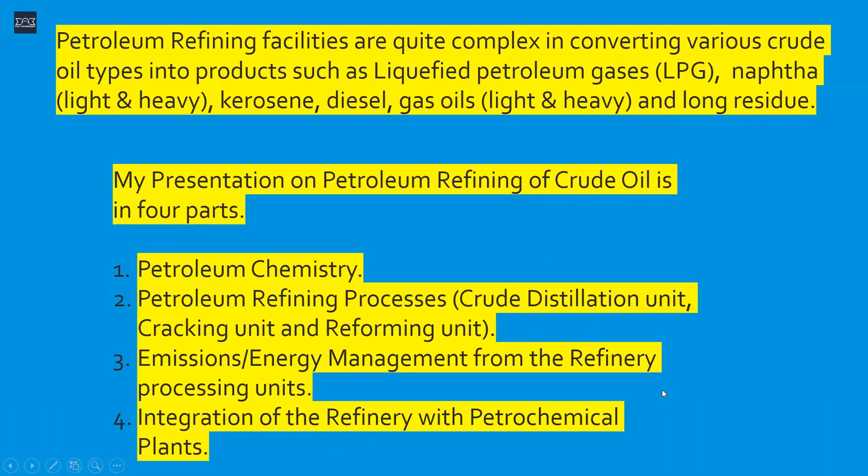Latterly, in the States, the Biden administration has provided some incentives to some refiners to switch to sustainable alternative aviation fuel involving biomass, vegetable oils, and so on. But this presentation will focus mainly on crude oil and not the sustainable type of refining.

Now, this is just a snapshot of a table relating to the various countries and continents providing the amount of crude oil processed per day. In particular, there's the Jamnagar refinery in India, which I'd like us to note. There's the new Dangote refinery, which is 650,000 barrels. And of course, the Sasref refinery in Saudi Arabia, which is 305,000 barrels per day. It has a 2-train crude distillation unit.

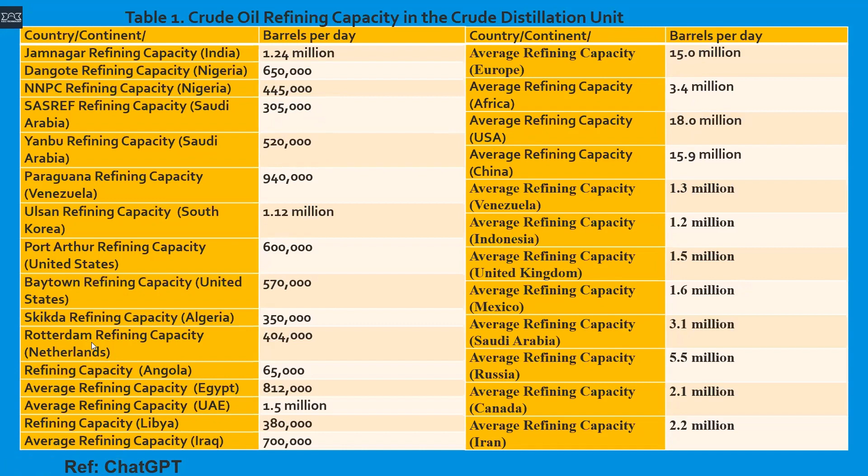And again, what we've got here will be the average refining capacity in the States and in Europe. I'd like us to be mindful of these values, which I'll be describing later on in my presentation, ladies and gentlemen. All the others from other parts of the world are as shown here in the table.

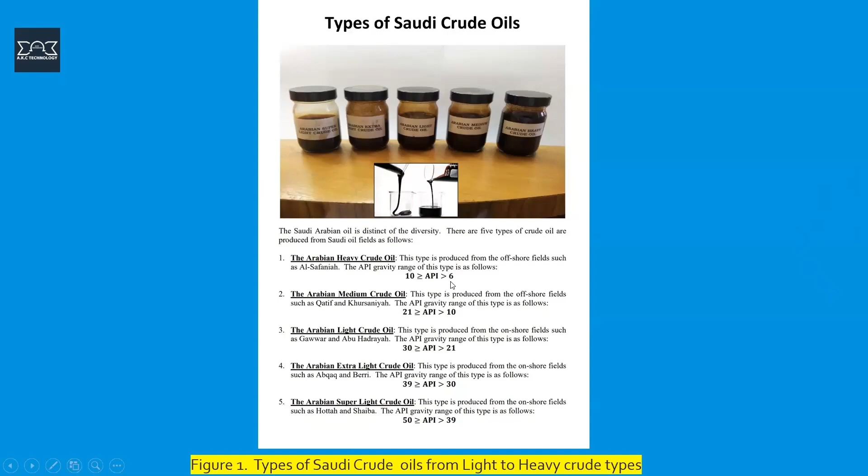And this comes from these crude types from Saudi Arabia, involving the range of crudes from the heavy crudes to the light crudes within these various ranges of the American Petroleum Institute. What we've got are the types of crudes from sour to sweet. The sour crudes contain a lot of sulfur content. And of course, these are highly premium types of crudes, which are highly paraffinic in nature.

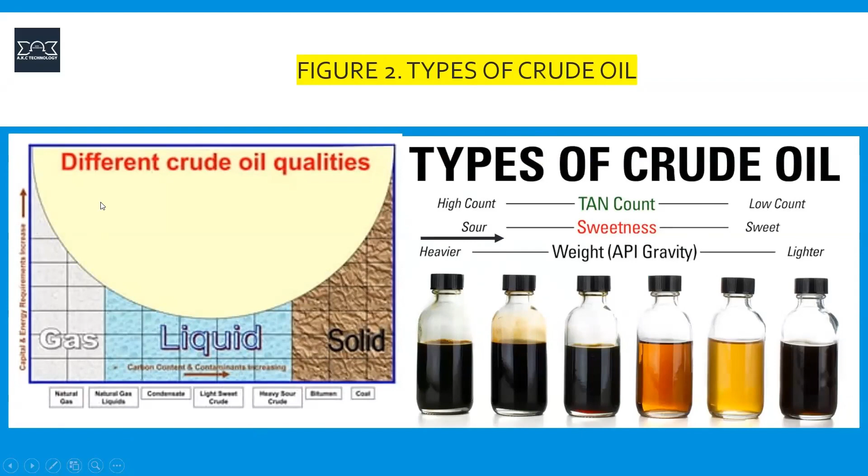On the left-hand side of this slide is just the phase change between gas to solid, involving the different crude oil qualities.

Please bear in mind, ladies and gentlemen, that we do not have the olefins, the unsaturated compounds, in the crude. These are actually produced during refining in the FCC, which is the fluidized bed catalytic cracking unit, which I'll talk on later on. I'll show you a video on that.

The crude also contains a lot of metals, sulfur contents, nitrogenous compounds, and salts. These must be removed during the refining process. The reason is that they could have severe adverse effects on the various process equipment, such as the vessels, the heat exchangers, and the pumps, and so on, relating to corrosion, plugging of the heat exchangers, of the tubes of the heat exchangers, and so on. So we must be confident on these things.

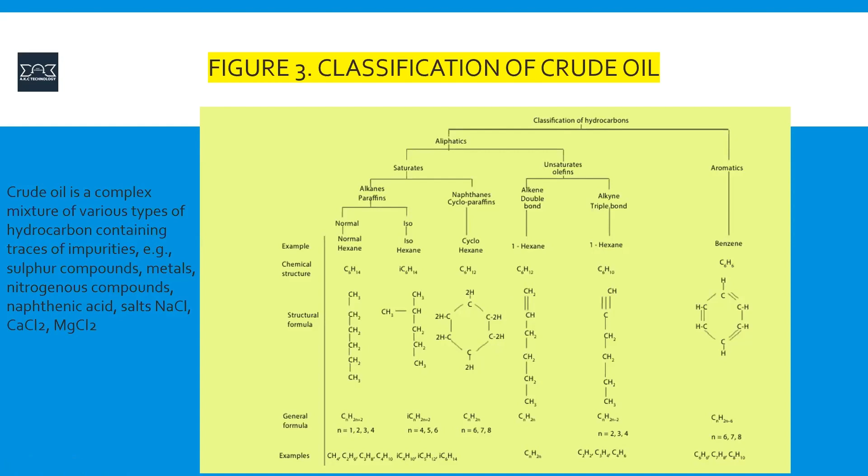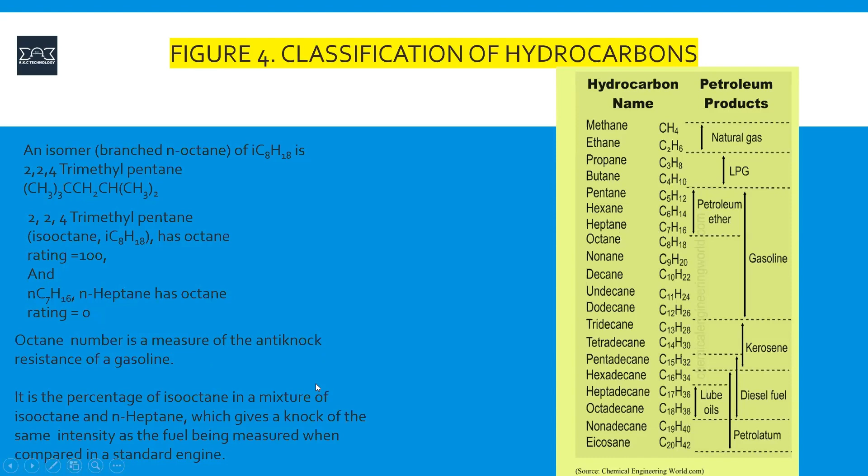And of course, in the categories and classification of crude oil, apart from the various compounds which we've highlighted earlier on, such as the salts, they are mainly paraffinic, naphthenic, and aromatics.

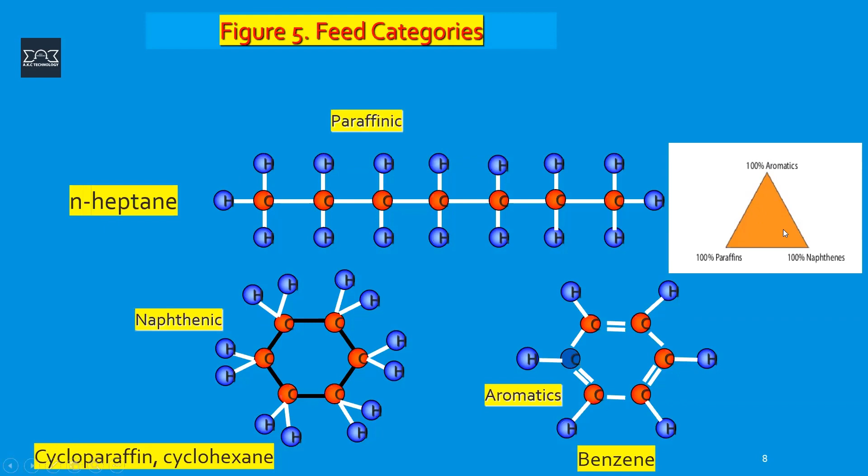If we look at the triangle, the crude will be in the middle, and the reason is that it consists of various percentages of the paraffinic, the naphthenic, and the aromatics. So all the various crude types are a proportion of these various compounds, ladies and gentlemen.

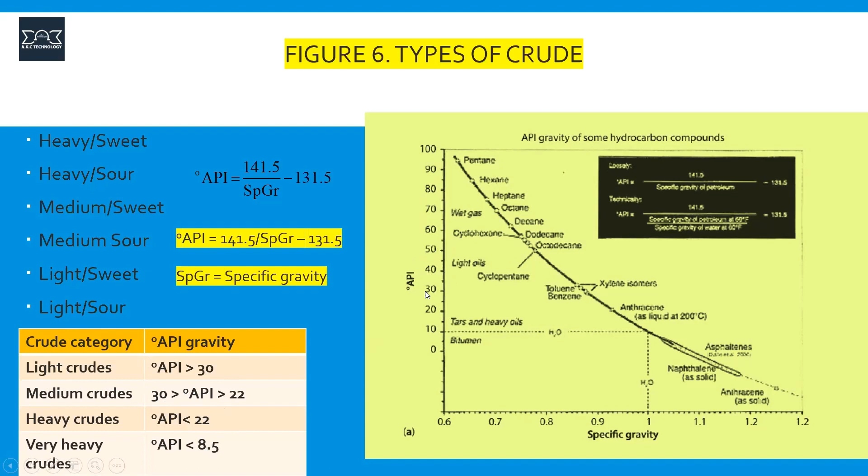Again, how do we classify the crude? We've got the American Petroleum Institute formula relating to the specific gravity, with the reference being the specific gravity of water. If we flip to this chart, from this simple equation we can get this profile, and classify our range of crudes. Knowing the specific gravity, we can classify into these different categories of crude types, as shown here. The light crudes will be above the 30 mark of the American Petroleum Institute standard.

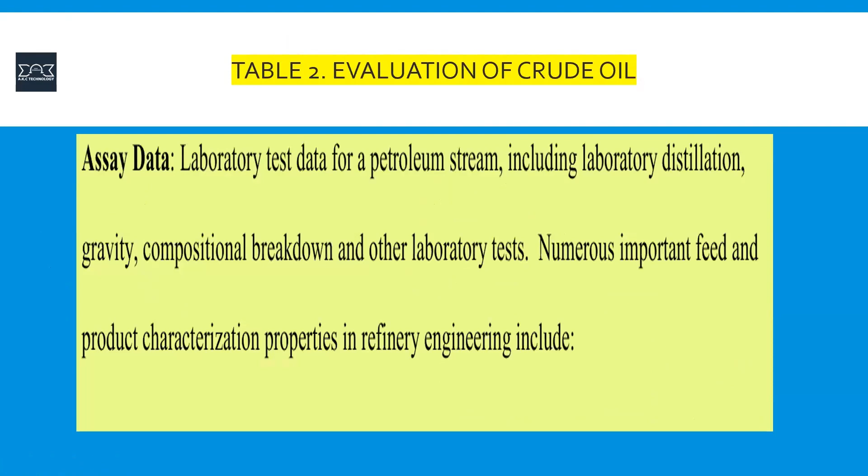Another type of classification relates to the assay data. The assay data allows us to have various series of experiments, and these are the various tests that could be carried out, from the API, which you have just seen, to the Watson characterization factor, as well as these other ones, ladies and gentlemen.

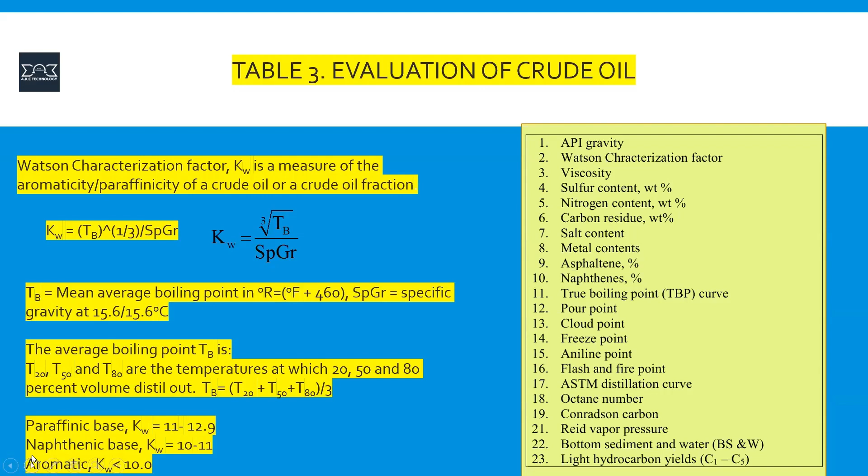An example of number 2, the Watson characterization factor, is obtaining the mean average boiling point at these various percentages which have been distilled. We find the average from this volume that has been distilled, in the old unit, which is Fahrenheit. We add a constant value to it. We know the specific gravity, and using that simple formula we'll be able to classify the types of crudes we've gotten, within these various ranges, either paraffinic, naphthenic, or aromatic.

Now, another classification relates to what is called the true boiling point. It's a basic tool which allows the refiner to decide how suitable the crude is before it goes into production. It uses the American Society of Testing and Materials, involving 15 theoretical plate columns, as you can see in that diagram.

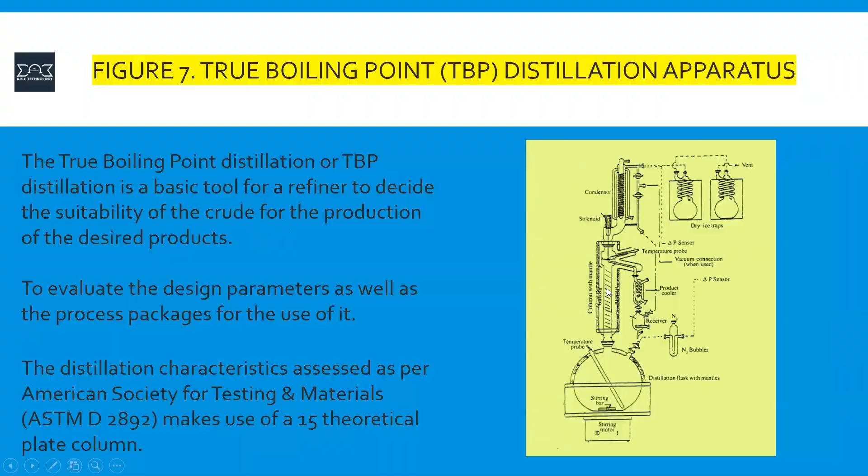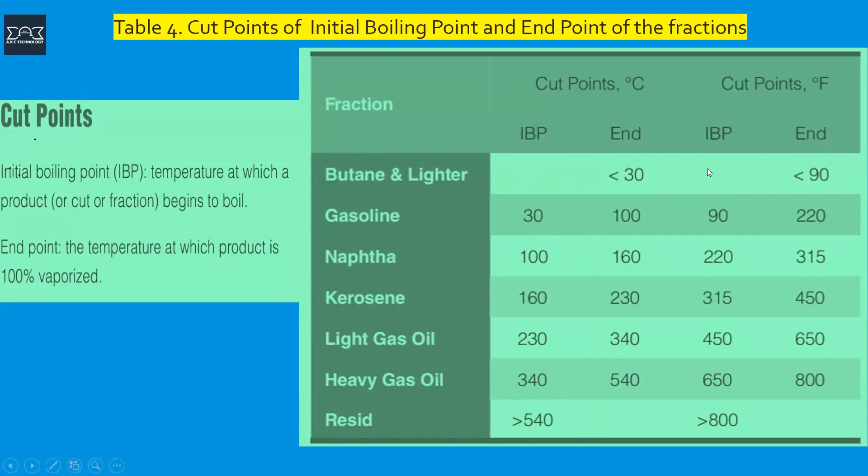Now there are different cuts relating to the various fractions obtained, between the butane, the gasoline, down to the residue. It involves the cuts with the initial boiling point of these various fractions at which they start to boil, up to the final end point when 100% of these fractions has actually been vaporized. So we can determine the various cut points either in Celsius or in Fahrenheit.

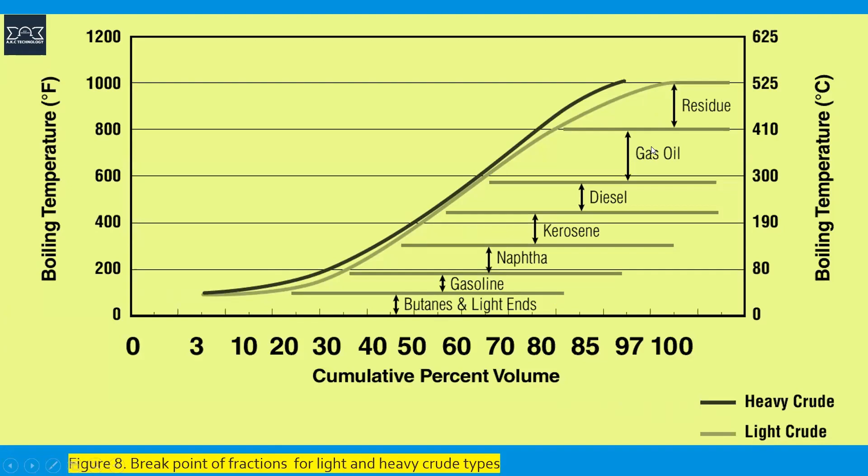And again, we can have our plots, and these are various plots for the heavy and light crudes. You can see the various endpoints there, from butane to the residue. And that completes the chemistry aspect of the crude types, the various crudes.

And again, we must understand the kinetics, the rate of reaction relating to the kinetics, the concentrations, and the Arrhenius equation, activation energy. When we're dealing with catalysts, this is very important, ladies and gentlemen. Of course, again, we must understand the thermodynamics involved, whether it's releasing heat or consuming heat, as the case may be. But we know the rate of reaction doubles for each 10 degree rise in temperature. And if we're dealing with a catalyst, that is very serious for us, relating to the heat of generation, because as it's brought into the system in the reactor, it's taken out relating to the heat of removal.

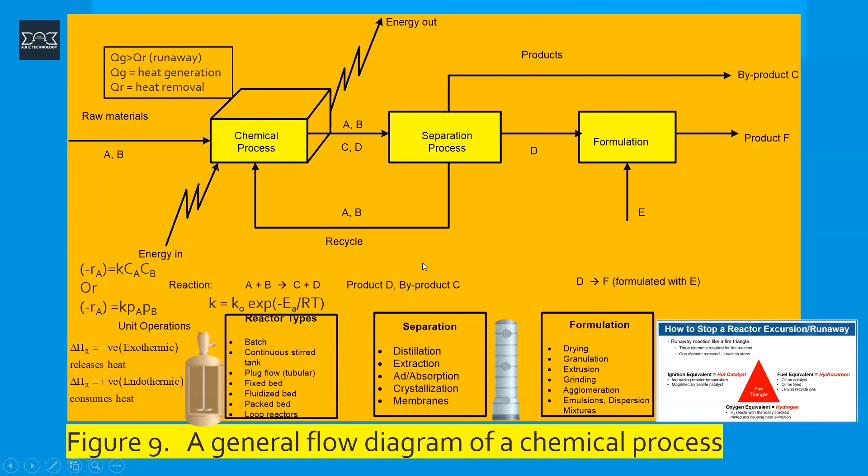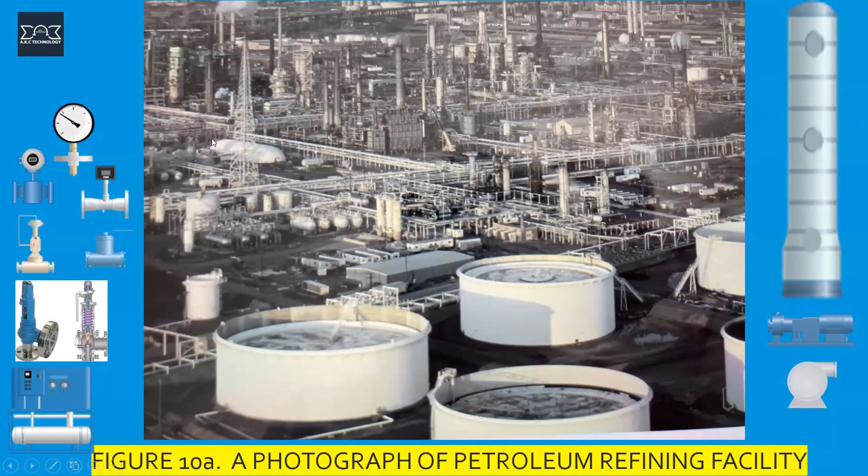Here's a photo of a typical refinery. What we've got here is an incredible series of pressure vessels, distillation columns, heat exchangers, pumps, storage tanks, a fired heater, and an incredible network of pipelines.

These pipelines convey flammable, corrosive, combustible fluids, maybe single phase, two phase, or a combination. They go through various instrumentation, such as a pressure gauge, measuring instruments, valves such as gate valves and globe valves, and of course relief valves used to overcome overpressure in various vessels, and of course metering.

If we look closely here, we've got porta cabins in this particular refinery. An incident happened in 2005 with the BP refinery, whereby there was an explosion, and 15 people in one of these porta cabins lost their lives. You can visit the website to see more on the animation of this.

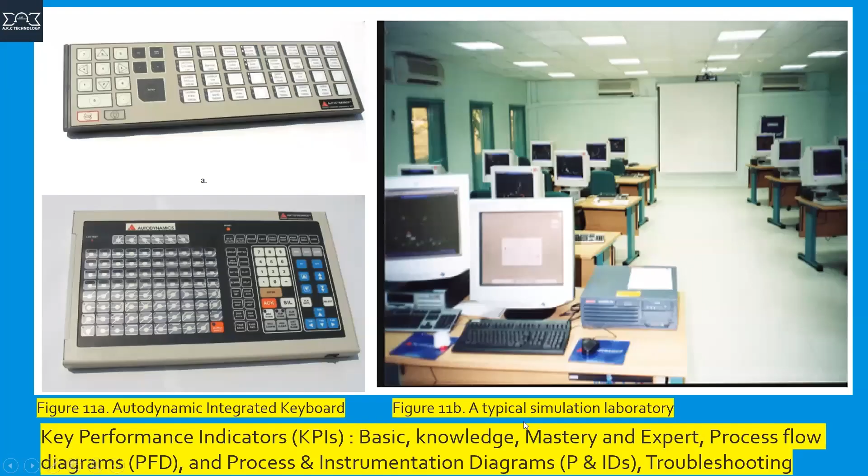Now here is a simple laboratory simulation lab whereby process operators, or panel operators, will need to be able to operate and understand the various process instrumentation relating to startup and shutdown of various units, and the trips that could occur in pumps, motors, or valves. So basic to mastery knowledge involving the KPI must be acquired, otherwise it presents a difficult problem for people going to the plant.

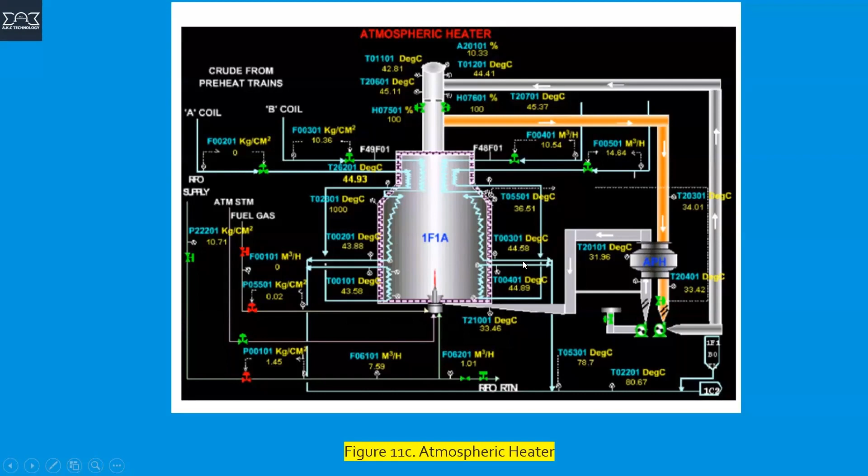An example of this is a fired heater. You can see all the various instrumentation connected to it, and the understanding of its operation, the trips, and the startup and shutdown of these must be acquired.

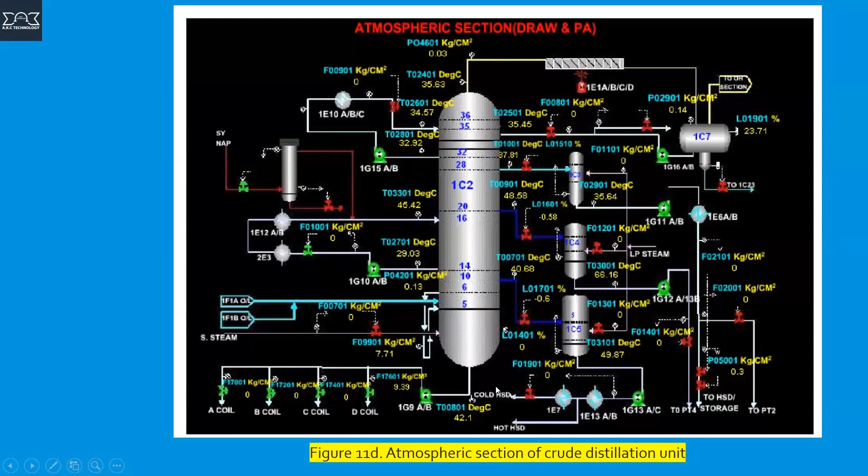Likewise, with a distillation column, the operation relating to the profile involving pressure, temperature, flow rates, and offset conditions such as flooding of the column, foaming of the column, and weeping, are items that operators must be aware of and be expert in troubleshooting and correcting.

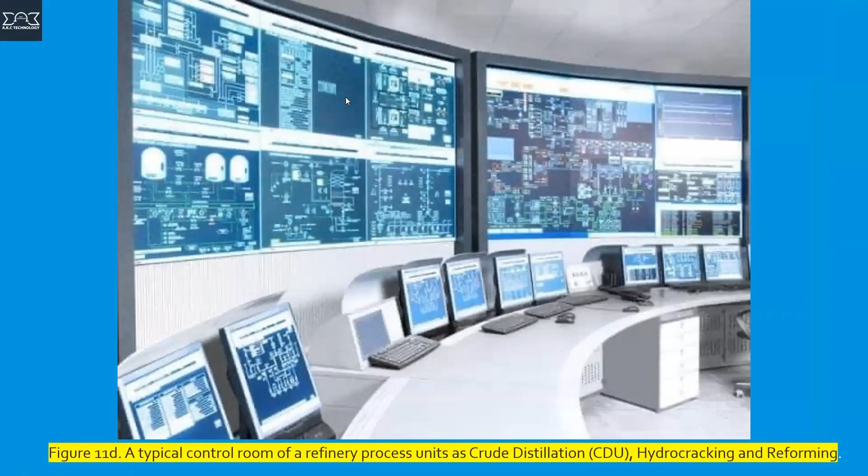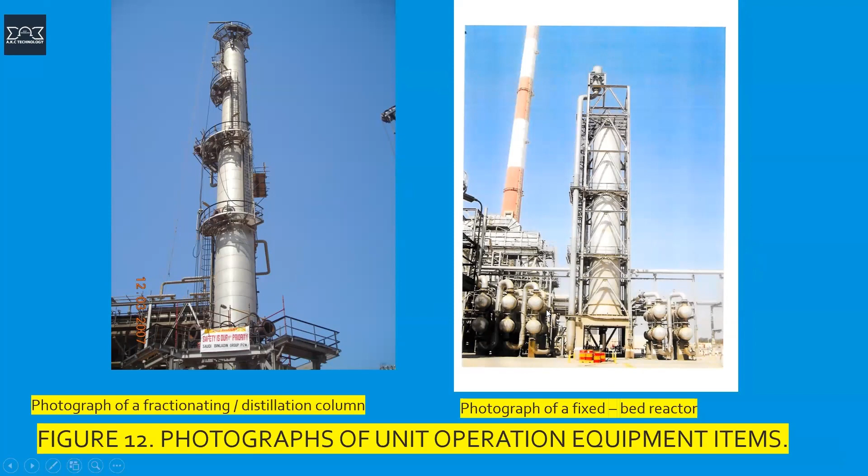An example is this: the distillation column, the fixed bed reactor, and others are centrifugal pump, shell and tube heat exchangers. This one happens to be involving a turnaround issue, and of course we need to acquire the necessary work permit for the work to be conducted during the turnaround. It's an interval of about 5 to 6 years in a refinery where various maintenance work is being carried out. An example here is removing the shell and tube heat exchangers for cleaning because it's being fouled with coke.

And of course, the personnel involved with a supervisor seeing to everything is working in good order, we will have the various process and safety equipment like helmets, the gloves, and shoes, and so on and so forth.

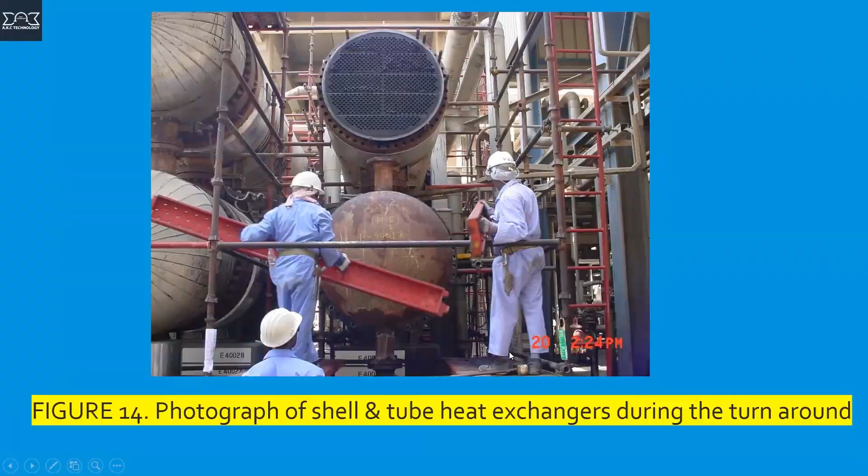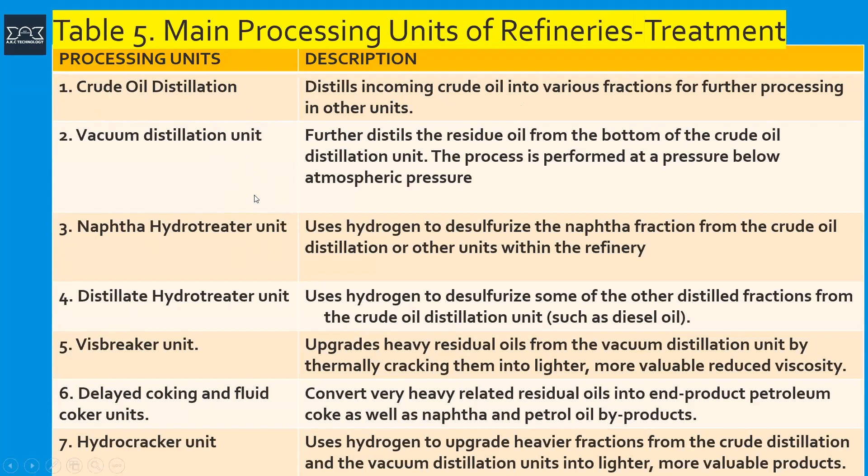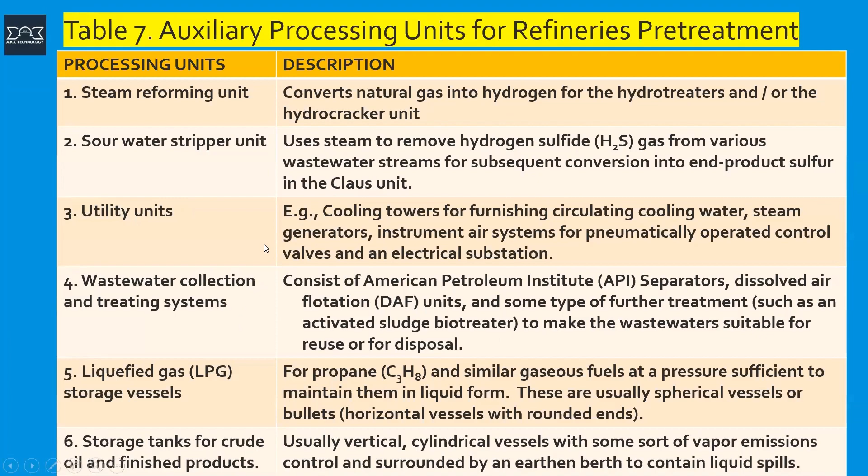Now, the crude units, the descriptions in the refining, is all listed here. These are the various process units, which are all numbered, ladies and gentlemen, and the corresponding description for each of these is also stated, from the crude distillation unit up to the FCC unit, the amine, and the utilities as well in the reforming unit, whereby we're able to obtain the hydrogen, which I'll talk on later in this presentation.

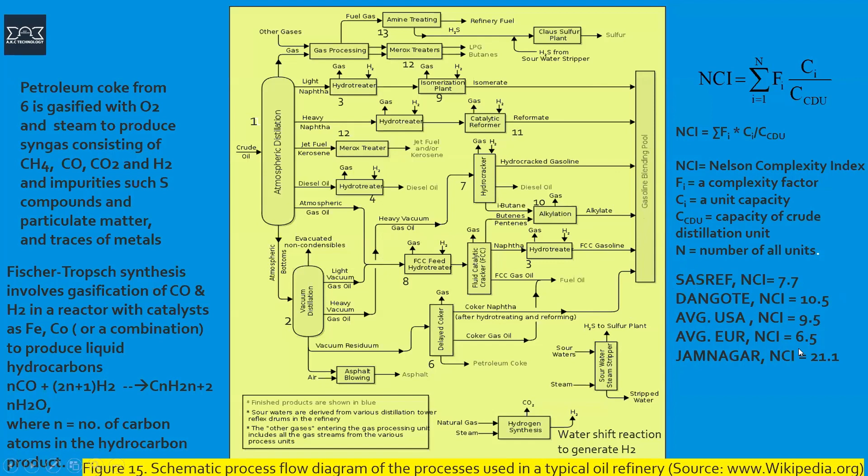The Dangote refinery, which is just being commissioned and is in operation, is 10.5 again, because it has an add-on of petrochemical units attached to it, such as the production of polypropylene, maybe ammonia, urea, and so on. The SASREF refinery is 7.7 in Saudi Arabia. And of course, the averages of the USA and Europe are these respectively, ladies and gentlemen. So the methane reforming is the production of hydrogen, which is then used for the hydrotreating and hydrocracking unit.

It uses natural gas and high pressure, high temperature steam, along with a catalyst, to produce products. The thermodynamics involved is a combination of endothermic and exothermic reactions. The products are carbon dioxide and hydrogen.

The hydrogen here is known as gray hydrogen. If the carbon dioxide is captured during this synthesis, it becomes blue hydrogen. Of course, green hydrogen is when you use electrolysis or biomass.

Once we've got our products, they need to be separated. The only way to do that is using what is called pressure swing adsorption. The carbon dioxide can be compressed and stored, or used in various petrochemical processes.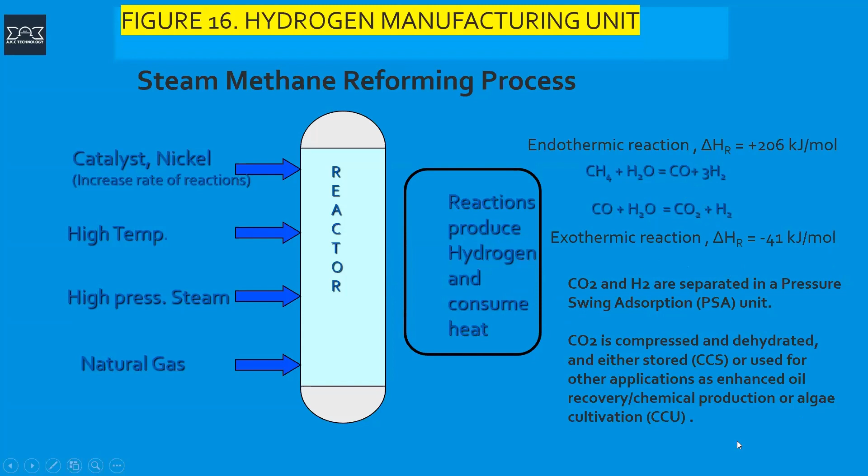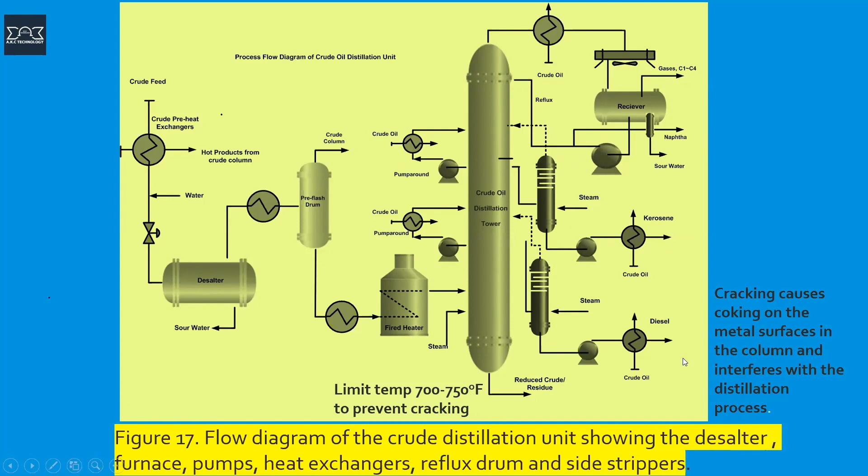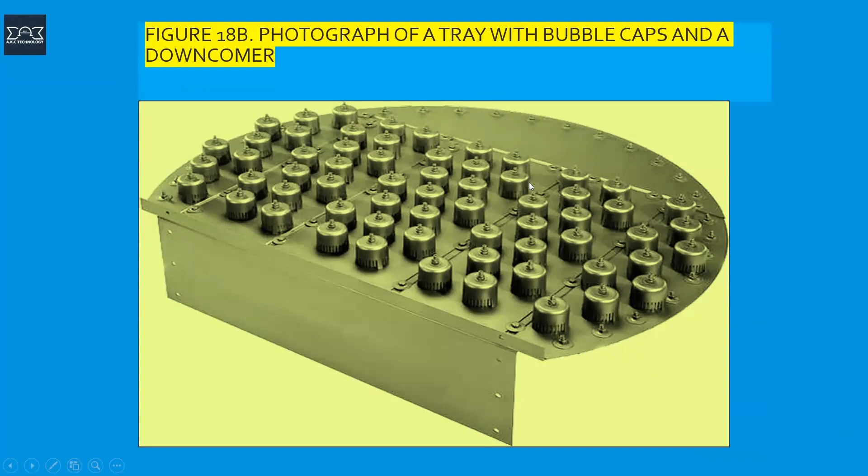This shows the operation taking place between the bubbles and liquids in the column. This is a bubble cap plate, with vapor rising through the slots, mixing with the liquids to reach vapor liquid equilibrium, and the liquid flows down the downcomer.

The long residue comes from the crude distillation unit. By the way, so far this is a physical separation taking place, making use of two parameters: temperature and pressure. There is no chemical reaction yet.

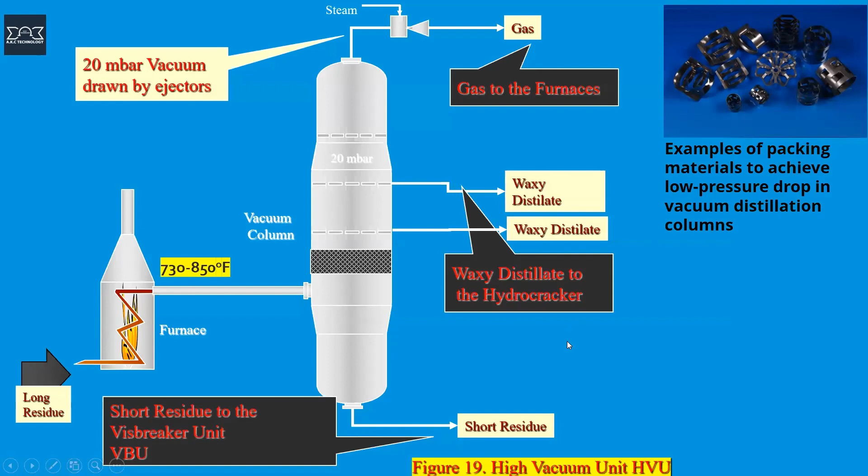So the long residue goes through the furnace at a high temperature. Here, instead of using plates, we use packings, to reduce the pressure and maintain a low pressure, with a vacuum being applied. We get our products as well as the distillates and the short residue.

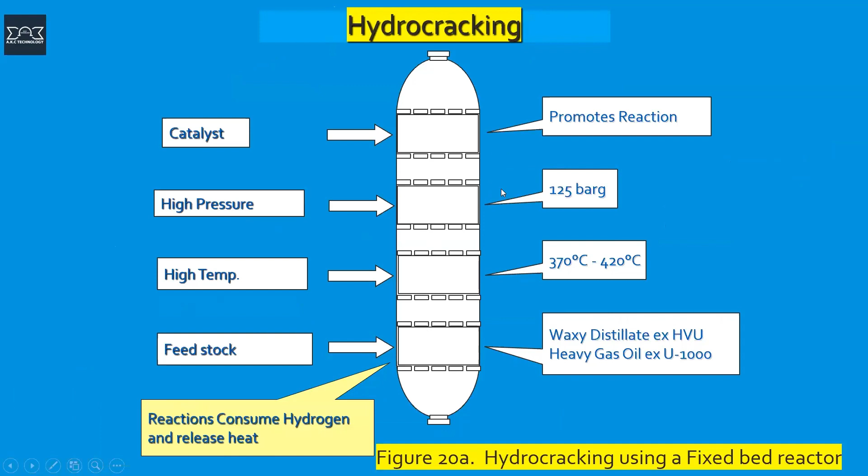Now in the hydrocracking process, the feedstock is the waxy distillate from the vacuum unit. It goes through various packed beds to promote reaction, with catalyst involved. This is the fixed bed reactor.

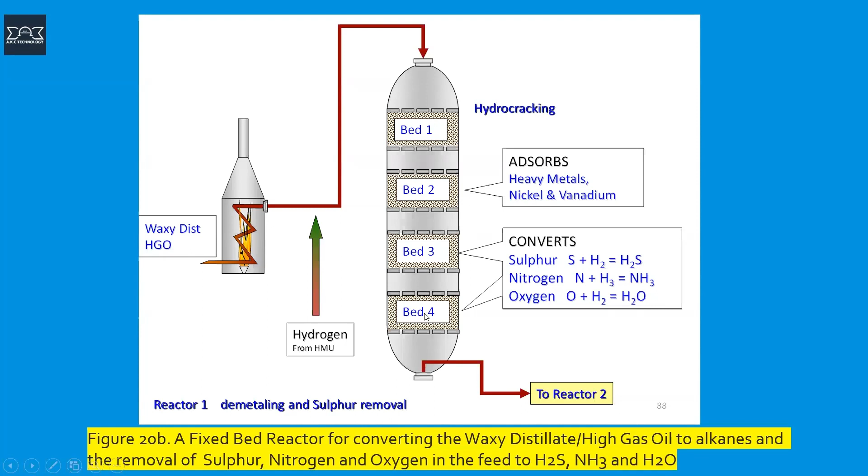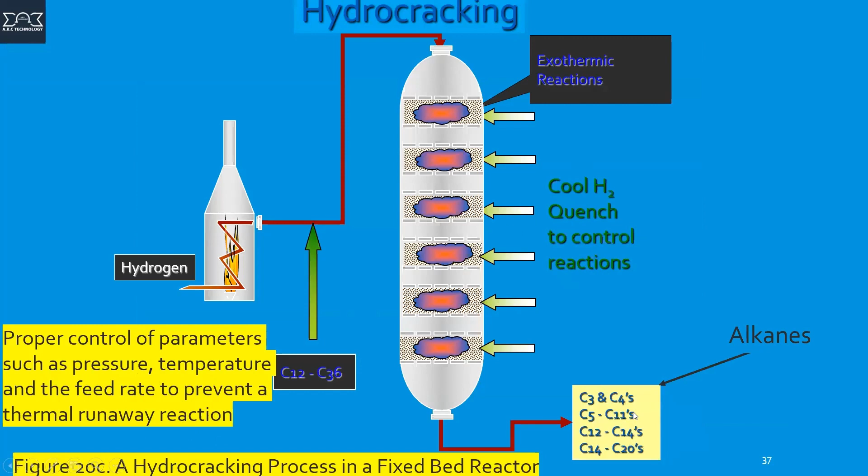Remember what I said earlier about the runaway reaction - this will need to be controlled. Otherwise, the parameters involved, such as temperature and pressure, can lead to thermal runaway. We've got our products, and these products will now have to be separated, which is done again in the distillation column to get the various products for usage.

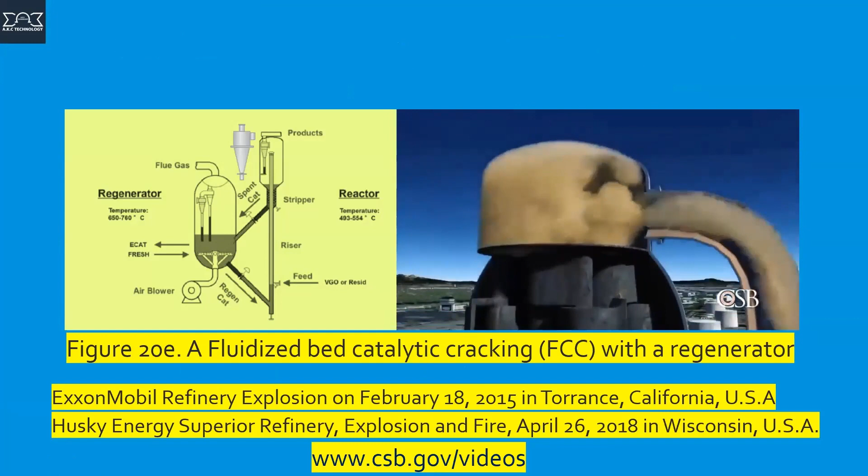The hydrocarbons are first fed into a reactor where they mix with the catalyst. The heavy liquid hydrocarbons are converted into lighter hydrocarbon vapors as they travel up the reactor. At the top of the reactor, the lighter hydrocarbon vapors are separated from the catalyst.

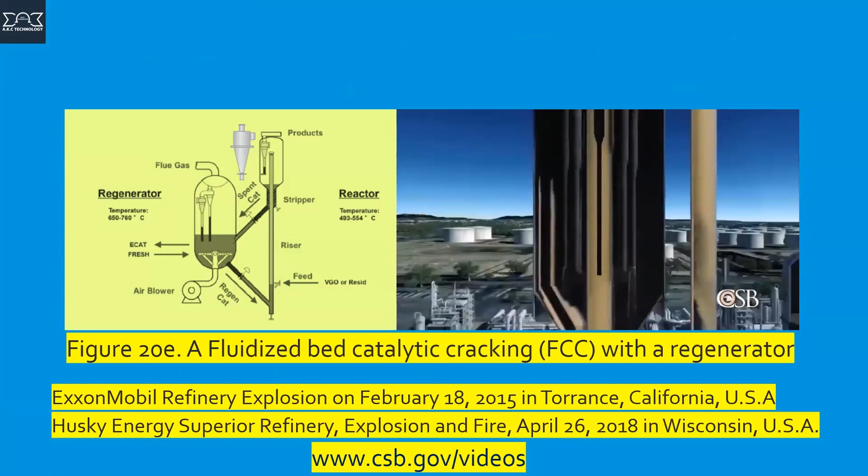The hydrocarbon vapors then flow to the main distillation unit. The catalyst falls down the side of the reactor where it moves through a slide valve to a piece of equipment called the regenerator.

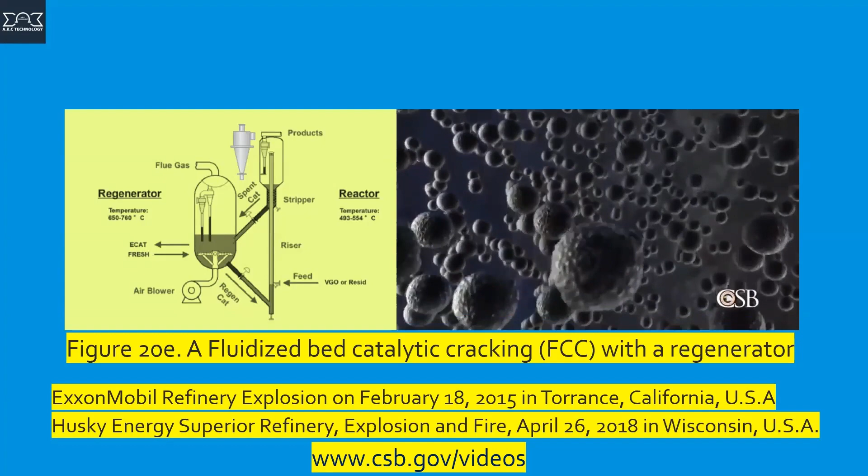During the reaction, a layer of carbon called coke forms on the catalyst that must be removed. Inside the regenerator, air is added, and the coke on the catalyst is burned off. The catalyst is then fed back to the reactor through a slide valve, and the cycle is repeated.

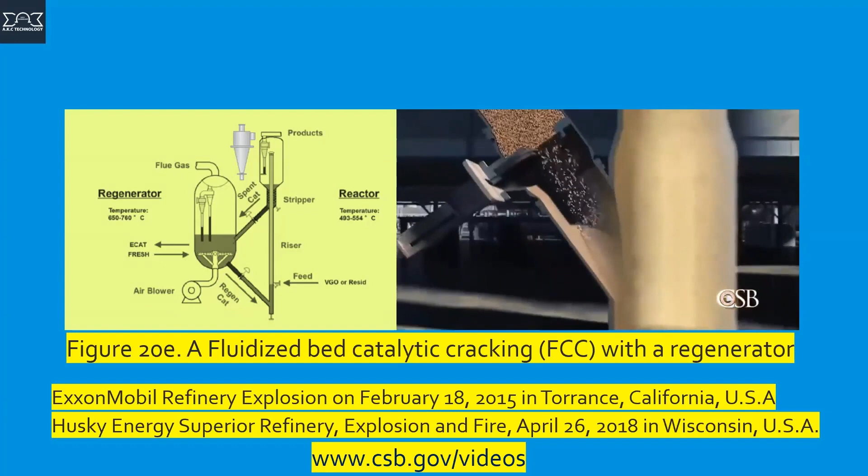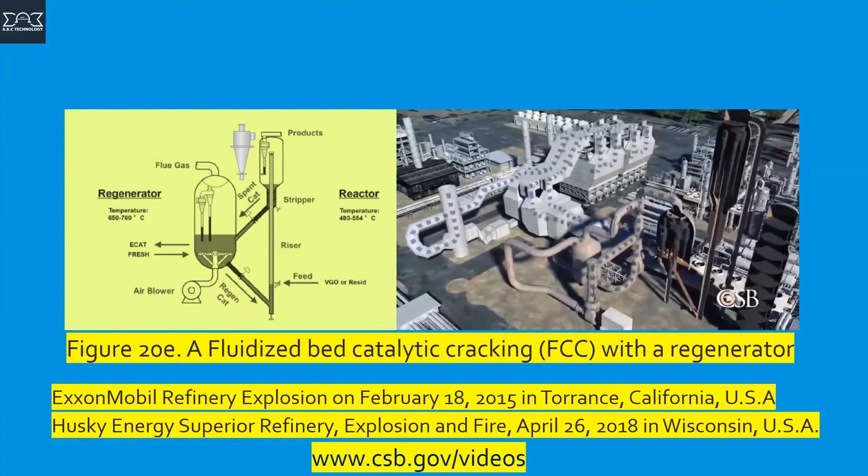When the coke is burned off the catalyst, this creates products of combustion called flue gas. The flue gas flows out of the regenerator and enters a system comprised of multiple pieces of equipment, which remove any remaining catalyst particles present. The regenerator and flue gas system comprise the air side of the FCC unit.

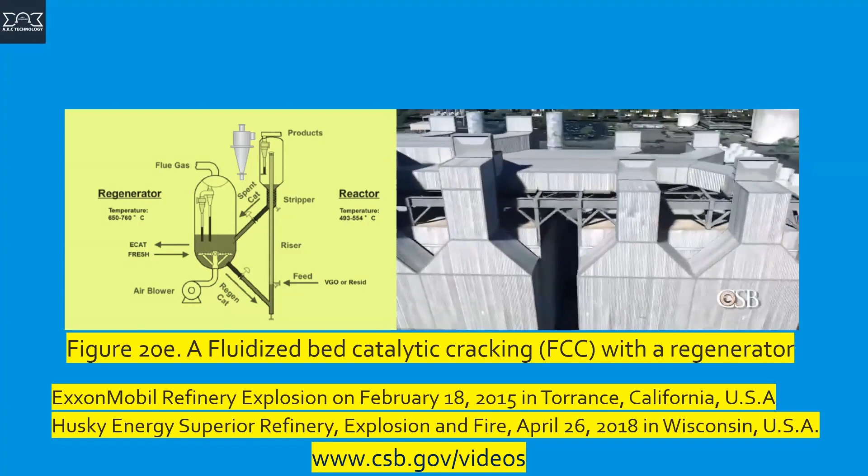The last piece of equipment in the flue gas system is called the electrostatic precipitator, or ESP. The ESP removes small catalyst particles using static electricity. While the ESP is energized, it creates sparks, which are sources of ignition.

What happens here, ladies and gentlemen, is that in this unit there were some explosions: in the ExxonMobil refinery in 2015, and the Husky refinery in 2018 in Wisconsin. You could see the animations of these from this website, ladies and gentlemen.

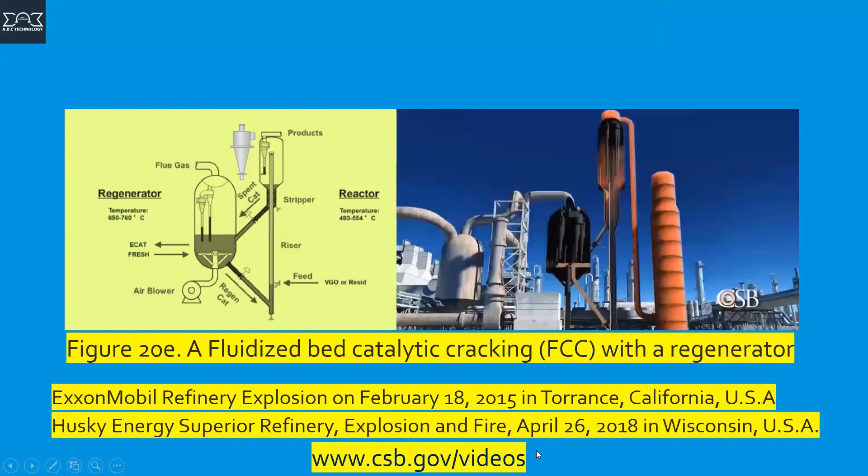Process safety management is a very important issue. Another disastrous explosion, with the loss of 15 lives, happened at the BP Texas refinery, and over 180 got injured. You could also see the video animation of this from that website, ladies and gentlemen.

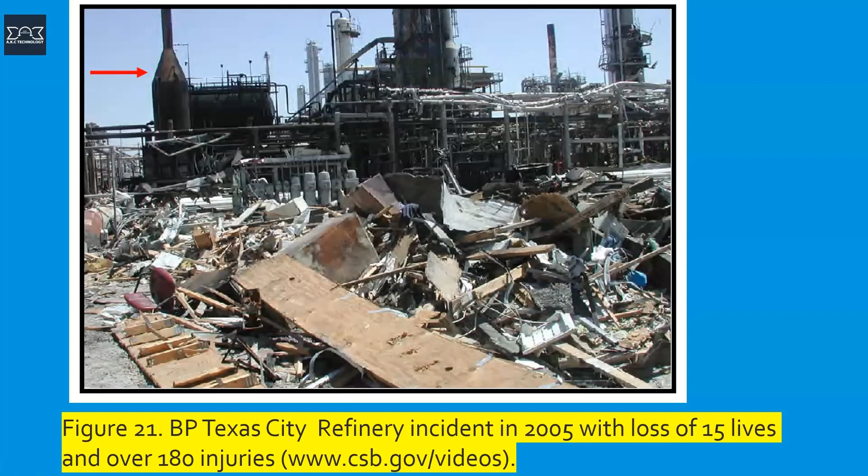So the process safety management system must identify, evaluate, and also control process safety hazards.

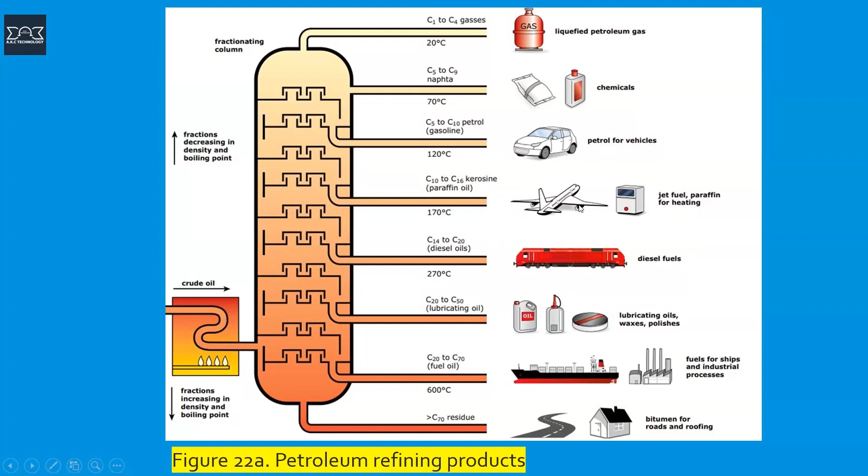Again, we have our products from the various refining processes, and these are the uses of these products, as mentioned by Dr. Sunday in the beginning of his presentation. These are household uses of these various products from crude oil, ladies and gentlemen. The one that the Americans are now switching to is SAF, sustainable aviation fuel, using biomass or vegetable oil. That is just an animation of what happens in hydrotreating, hydrocracking, and getting these various products.

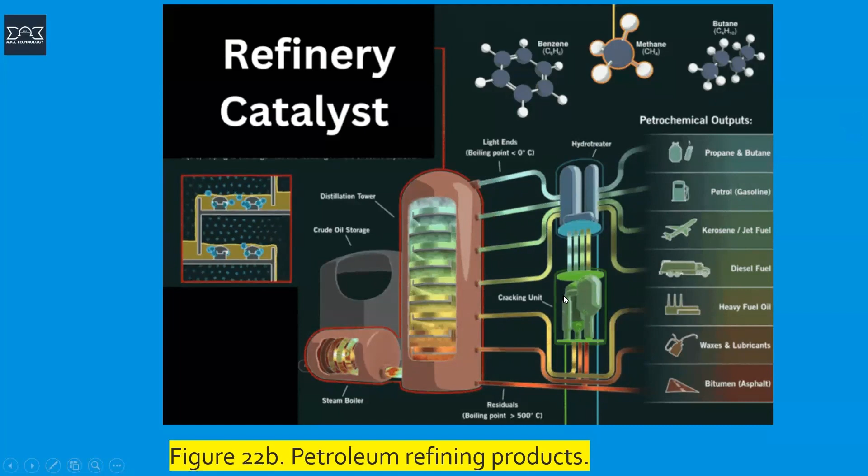So that completes the second part of my presentation.

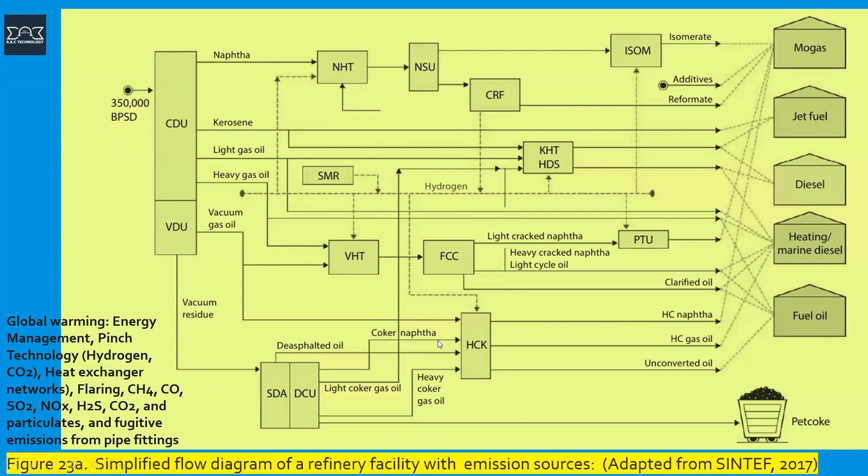The remaining parts, ladies and gentlemen, relate to global warming issues and energy management. There are various gases obtained, such as CH4, CO2, CO, NOx, and so on, from fugitive emissions from the various piping networks. This will need to be controlled, ladies and gentlemen.

Energy management relates to energy audits, relating again to areas of waste savings, potential energy savings, and energy optimization, involving various process controls, heat recovery systems involving pinch technology as the case may be, and cogeneration, which is combined heat and power, and fuel gases which are obtained from a different unit, as you can see here, the off gases.

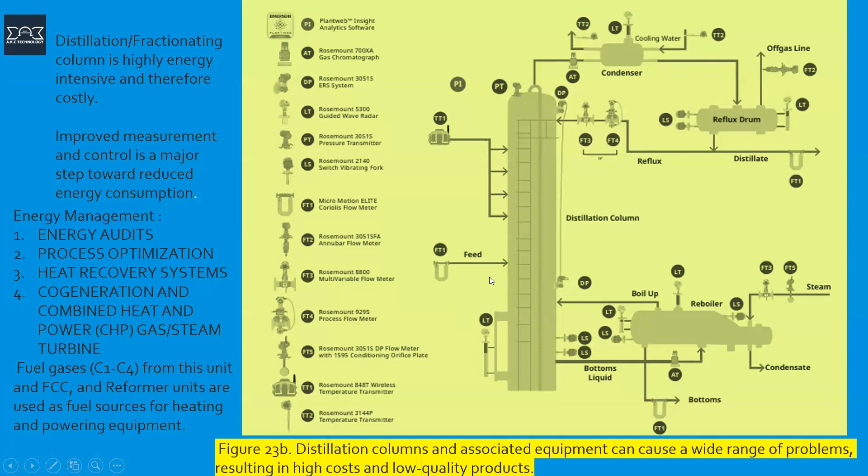Again, from the FCC unit or the reformer unit, these gases can be used for heating and powering equipment, ladies and gentlemen.

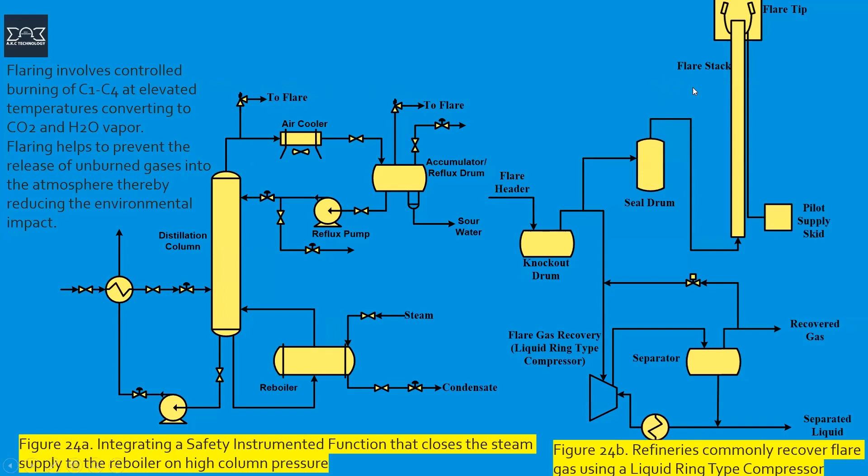And again, for flaring, the gases, which are C1 to C4, are sent through to the flare header. At elevated temperatures, they can be converted into CO2 and water vapor. Flaring actually helps to prevent release of unburned gases to the atmosphere.

And finally is the petrochemical issues, whereby we've gotten our products. These products can then be sent through to the petrochemical plants, as in the Jamnagar refinery in India, or the Dangote refinery in Nigeria, to make propylene, as the case may be, or in some cases to make urea.

These are some of the products from petrochemicals, obtaining these from refining, the benzene from the reforming units to make styrene. The intermediate there is ethyl benzene.

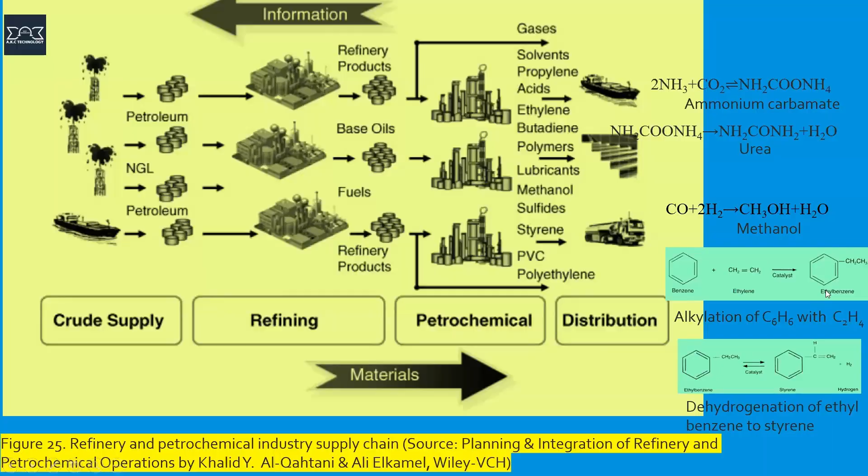So in conclusion, what we can say, ladies and gentlemen, is that at least 46% is still needed for gasoline, whereby 54% is for petrochemicals. And the refining facilities can be integrated, as we have just highlighted, to make these various products, such as methanol, ammonia, urea, plastics, and so on.

Of course, greenhouse gas emissions is now the in thing in terms of CO2, which can be captured. There are various technologies in capturing that right now being implemented, along with various research work still continuing. The captured carbon dioxide can then be used to make all these, ladies and gentlemen.